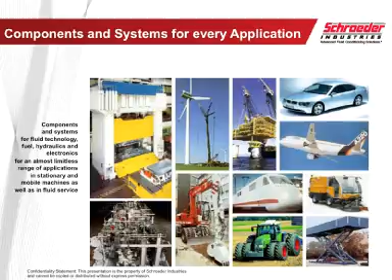One of the things, just a little background, I actually work for two different companies. Hydac Corporation, which does systems and components for every application. A few people here ask me who we are and what we do. We have a global footprint throughout the world. Hydac owns Schroeder Industries. Hydac is based out of Sulzbach, Germany. We are primarily the largest privately owned hydraulics company in the world, and we've taken some of the technology we've developed there and are utilizing it on our fuel side, primarily fuel filtration. We are both in the bulk side and for the on-engine and pre-filtration side. But there's really three things that are happening.

When I was asked what's taken place in the industry, I've been involved in the industry for 25 years. Back when I first got involved, a fuel filter was basically a rock catcher. As long as you had a rock catcher at 100 microns with a built-in screen, you were good to go. The engines could eat up water, rocks, boulders, and anything you put into them.

Tier 2, Tier 3, a little bit more sensitive, but oh boy, Tier 4 is a whole new ball game. I deal with both the design side and the marketing side, responsible for developing solutions based in the market. And I primarily start a lot of times hearing from the end user, the fleet owner, and how that rolls up into the customer itself.

One of the things for the end user and fleet owners out there is a misconception about Tier 4 and the technology. They believe the engines aren't as reliable. There's a perception they're a lot more sensitive. Some people could argue that perception is absolutely true. However, with all the new technology and costs associated with it, there's very little being done both on the educational process for the bulk side and the forward development process for the on-engine products. That being said, what worked 25 years ago does not work effectively the same as it does today.

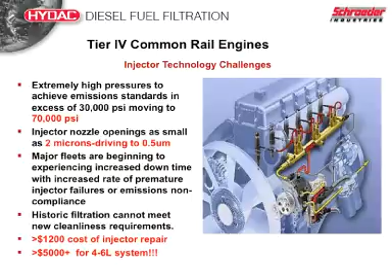The fact is when you are looking at a high pressure common rail system, a 4 to 6 liter system is a $5,000 system or more to repair. A lot of the engine sizes we're talking about here today are considerably higher than that.

There's a trifecta in the industry that I think is going on based on some of the data we've had, trying to understand the issues along with educating our customers and OEMs. You've got the Tier 4 regulations and the Tier 4 high pressure common rail systems. That's number one, the game changer in the industry.

Number two is the introduction of ultra low sulfur diesel 15, ULSD 15. The last few years there's been a change over to that. Off-road diesel is still at a different level than on-road diesel, but ultra-low sulfur diesels have a tendency of holding and absorbing more water than the old high sulfur diesels did. That creates a larger problem when you get into cold start issues and the lubricity guides.

Part of what happens is when you're removing the sulfur from the fuel itself, you are removing part of the lubricity agents that naturally occur within the fuel. They put additives back into the package to be able to blend them, mainly for the wear materials. But part of the thing that happens is surfactants are introduced into the systems, and it lowers the surface tension of the fuel.

When you lower the surface tension of the fuel itself, that directly relates to how effective the filters are at removing water. If the fuel is too thin, it's very difficult to remove the water. If the fuel is too thick, it's also very difficult to remove the water. Most of the testing done in the background has been between about 20 and 30 dynes.

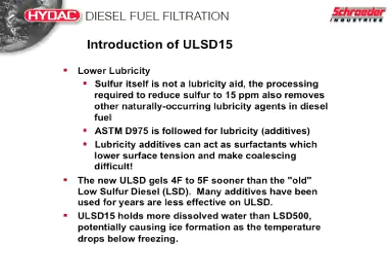You're finding now that biofuels and ultra-low sulfur diesel in its raw state, without even a biodiesel blend, are operating somewhere down between the 8 to 10 dynes area. That is a big, big problem in removing the water.

The third thing happening in the industry today is the addition, on top of ultra-low sulfur diesel, of biodiesel. Biodiesel blends are not mandated regularly across the country. Most engine designers and fleet users are anywhere from a B2 to a B20, most of them somewhere in the B5 to B15 range.

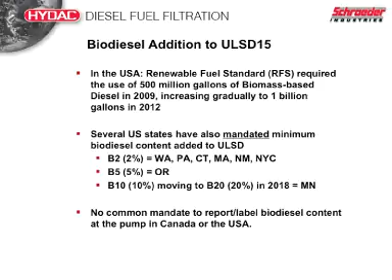What a lot of people really don't understand is the amount of water that biodiesel can hold in a saturated form. When you're looking at a B2 blend, you're somewhere around 250 parts per million of water; B5, 500 parts per million; and up to 1,600 parts per million for B20, at ambient temperature outside during the summertime.

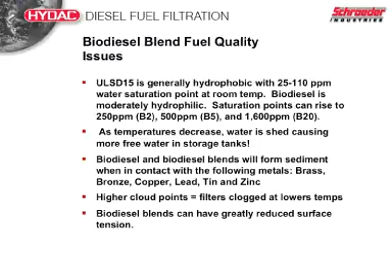When you look at the surface tension, I'll show you a couple different slides here. This slide shows a colleague of mine I used to work with at my previous company, Dr. Christine Stanfel, who was one of the first to come to me and say part of the technology we really need to work on is new media, to be able to separate the lower surface tension fluids that were out there.

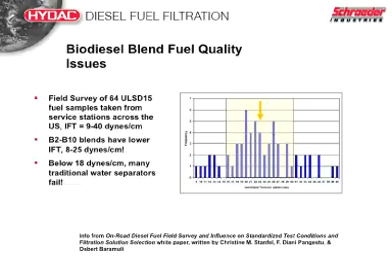My previous employer didn't really pay too much attention to that. They said, hey, what's been working for us has worked great throughout the years, we're going to continue with what we have until there's a real need to change this. Well, what we found in the lab over time is that the products effectively working prior to that were no longer working effectively when you put ULSD along with biodiesel blends in there, and part of the issue is when you look at the saturation curves, the dissolved water versus the free water.

Now all of a sudden, that solution is 150, 175 ppm of water. Where'd the water go? The water's still there, isn't it? What it did is it went from a dissolved state into a free state. That free water at night fell to the bottom of the tank. The following morning, you go to start up that equipment. Where does the tank pump pull from? The bottom of the tank. So you've got emulsified water that's being fed into the system.

When you look at a B15 blend, that almost doubles in size as compared to a B5 blend.

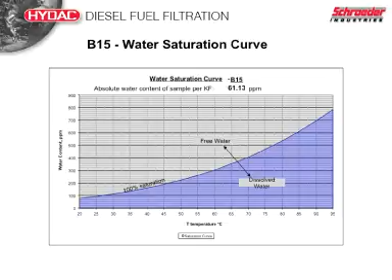So when you put the three of these together, taking out the particulates and taking out the water, along with the addition of biodiesel and ultra-low-sulfur, it's a game changer taking place today. What our company is trying to do is protect your investments from the OEM, and protect the fleet users, so they have a product that works more effectively, to its design parameters and standards.

When I first made my bones in the industry, I worked with the automotive companies, Ford, GM, and Chrysler, on the fuel side of the equation.

When you're designing a fuel system and an interval change-out for your fuel filter, say 500 hours, you have a set point. You have an X amount of fuel going through the system, and an X amount that needs to be delivered at a certain cleanliness level. As an engineer, you have to start off with where you ended up, but you have to start with a known. As long as that known remains consistent, all of our systems and equipment operate effectively. What happens is when that starting point changes.

When that starting point changes, guess what? All bets are off after that. So to look back at this, the big factor I'm going to zero in on is the water side of the equation.

Water was not a big deal in the diesel side of the equation 10 years ago. Today, it's a much larger issue than it was. You keep the boulders out, you're all right. But water today, and the lower lubricity you've got with ultra-low-sulfur diesel, is a big game changer out there.

Bacteria - anybody here ever see bacteria in the fuel tanks of either the equipment or out in the field? That's another major game changer out here. Most of your fleet users, most of your end customers, have not upgraded their infrastructure. They're using the same infrastructure they've had for years and years. Same day tanks, same fuel tanks with sludge and sediment at the bottom that haven't been cleaned for years upon years. Bacteria is a huge problem in the system, both for the after-treatment systems, the injection systems, and the fuel filters themselves.

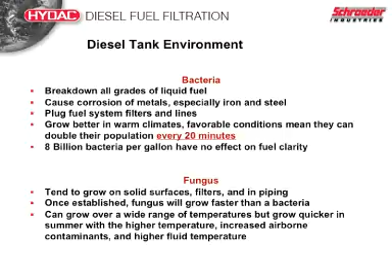Going back to the question I originally posed to the customer end user: do you have any fuel quality problems? No, none whatsoever. Well, you start to go down the list.

Are you having any high-pressure common rail problems? Are you having pump failures? Yes, matter of fact, our new Tier 4 equipment has more pump failures and injector failures than my old Tier 2s and 3s combined. I've also got shortened life on my fuel filters that are supposed to be on the engine and on the pre-rail itself. My service intervals aren't being met, and I also see both free water and emulsified water in my system.

Well, sir, in the big picture, doesn't that mean you probably have something going on in your system? Realistically, that all revolves around fuel quality issues, which are directly related to operational expenses, high maintenance cost, unexpected downtime, schedule delays, reliability expectations not being met, along with increased fuel cost. What does all that lead to? It leads to bad customer satisfaction.

So I like the analogy Jamie used earlier - he's got a product, but nobody wants to buy it, kind of like the Motorola phone. Well, I've got a product that everybody needs, but nobody wants to spend the money for it at certain times, both on the bulk and on the mobile side of the equation.

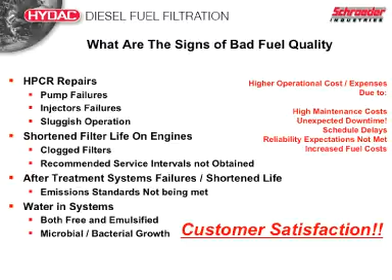When you're looking at the impacts, what directly are the impacts? When you have bad fuel in a system, this is a high pressure common rail system.

The injector poppet here, it may be difficult to see from the audience, but there is some pitting on the tip of that injector seat from emulsified water in the system. The scoring you see on the injector seat is from particulate components. Over time this starts to wear, and you put more fuel into the after-treatment system than what it was originally designed to handle.

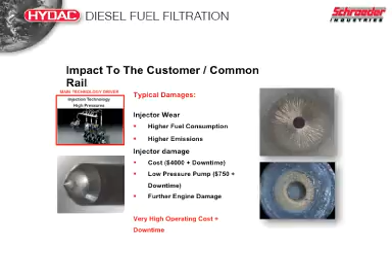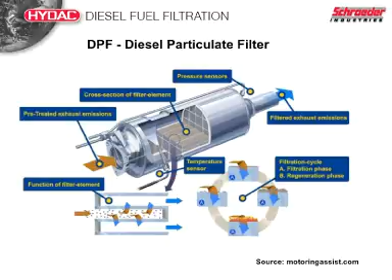Then you look at the lubricity side for the wear plate on the high pressure pump. All of that will not only affect the injection system, but can also overwhelm your after-treatment systems, which are the things we're trying to protect.

Uptime. Water within the system itself - you look at this as basically your diesel, your water, and the microbial growth that grows. The more you turn the fluid, the better off you're going to be, but once you have microbial growth or fungus within a system, it's almost next to impossible to thoroughly get out without doing a complete cleansing of both the day tank, the fuel tank, and the system itself.

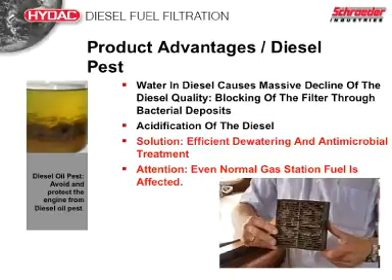This will give you an idea of what the filter would look like - microbial growth, existing filtration. If you're currently using what you've been using for the last 25 years, I can just about assure you that the old cellulose technology out there is not cutting the mustard for what's needed.

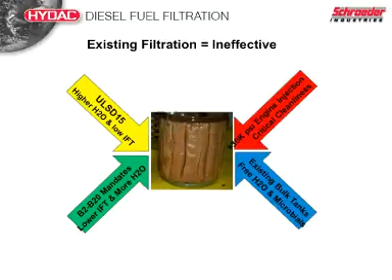You look at the lower IFTs, the high pressure common rail pressures that need to be achieved, along with the existing bulk tanks with the free H2O and microbial growth that's out there. Those are all big game changers.

So much so that in 2012 - remember, 2011 was when Tier 4 interim occurred for over-the-road vehicles, and 2014 is when it became compliant - in 2012, all of your major manufacturers for both engines and injectors, Bosch, Denso, Delphi, all those guys got together with a common position statement because there were so many injector failures.

There were so many after-treatment failures out there. What do we do? Well, they had to go back to what they were doing in the lab. Instead of reinventing the wheel, they adopted the ISO code, the International Standards Organization for Cleanliness Specs, and they arrived at a worldwide fuel charter.

Saying that in all of your bulk tanks out there, you need to be at an 18, 16, 13. So that when we deliver to our fuel tank, we can then take our fuel tank, dispense that down to a 15, 13, 10, and between our pre-filter and our engine filters, we can get to an 11, 8, 3 at the injector. For those of us who've been in the industry, that is a big game changer.

To give you another visual, this is typically what we see in a patch test in a common bulk tank out there - 22, 21, 19. 30 micron cellulose spin-on filters have been pretty much the standard norm for dispensing filters for a long period of time. But as you guys know, when we're talking about an ISO standard that's 4, 6, and 14 micron in size, we're not even touching those parameters.

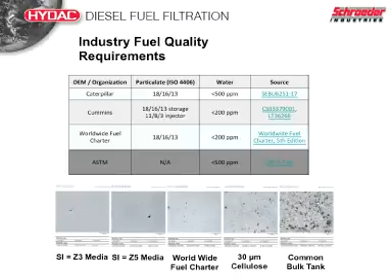It's still an educational process to this day in hydraulics - pressure filters, air filters, return line filters. When you look at the care and work that went into protecting those systems, we wonder at times now why that same work hasn't gone into the on-engine products that are there.

In some areas, it has. Some manufacturers are doing a great job. Other areas, it hasn't been as effective.

But all manufacturers, regardless of where they're at, your equipment is out of your control once it goes into a user's hand. The user can put anything into that fuel tank that he wants to, and they commonly do. Then they have problems that affect it down the road.

When you look at that same spectrum I gave you a minute ago, this is basically what your bulk fuel looks like. This is what the ISO mandate is saying you need to be, along with all the other major OEMs out there, in the fuel tank. You need to be at a 15, 13, 10, so our on-frame and on-engine filters can get us down to the 11, 8, 3.

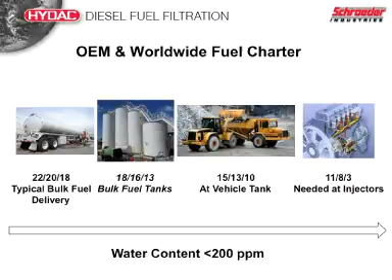How do you do that? It doesn't just magically happen. You have to have a very comprehensive strategy on how you're going to effectively handle your fuel, from both the bulk side to the equation into the main tank, from filtering - these are both particulate filters, and then liquid water separators that are on there.

Water separators are a huge, huge factor. For those of us in the south or in humid environments, what happens to your fuel tank during the summertime? Whether it be your day tank out here or your tank here, you're in a hot, humid environment. I'm right outside the Memphis area - it's 85 degrees with humidity for 6 months plus out of the year. As that tank is breathing in and out, you're pulling that humidity into the tank.

So you have to have some way to mitigate that. And that's really what we're talking about. Regardless of how bad the fuel is, if you properly mitigate it at each one of its junctions coming in, by the time it gets to the fuel vehicle itself, it can be able to provide and operate effectively where you need it to be.

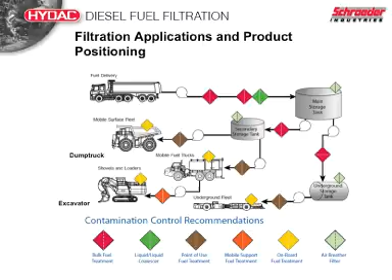This particular customer is a railway customer, and it's a mobile refueling truck that's basically bringing fuel to all the equipment servicing the railways. They're starting to get a flood of the new Tier 4 engines coming on board, and they had a massive, massive amount of failures with their Tier 4 engines for all the very same reasons I gave you earlier - shortened filter life. They had Tier 4 injector failures, high-pressure pump failures, and after-treatment system failures.

They asked us to take a comprehensive look and approach it, both the bulk side and the on-engine side of the equation, which we did. The example was what they were trying to do is get down to a 15, 13, 10 with a spin-on filter that didn't look like it had been changed in probably 30 years.

And what happens in fuel filtration? Fuel filtration has bypass built into it. So as long as you have flow going through the filter and fuel comes out, we're in great shape, right? But that all goes into the systems, and those are the things we're trying to protect.

So what we did is we worked with this customer to have a particulate filter followed by a coalescer. Coalescers remove the water. Particulate filters are important - it's a very important strategy we use within HYDAC. A lot of people will try to have one filter bolt-in for both particulate and coalescing, thinking that's going to solve all your problems. The problem is coalescing doesn't effectively happen very well when you have a lot of particulates on the filter. So the art of filtering is to basically have a particulate filter remove all the particulates so the coalescers can do their job - removing the water in a dynamic fashion over a period of time.

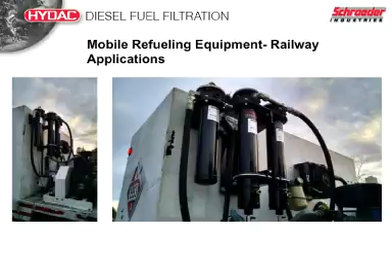Theoretically, the coalescers can last well over a year or indefinitely, providing you keep the particulate off of it. But the comprehensive strategy is particulate management followed by a water management program, both on the bulk side of the equation and for the on-engine, on-platform vehicle, mainly the pre-filter between the fuel tank and the engine itself. So with that being said, very short, very sweet. Any questions?